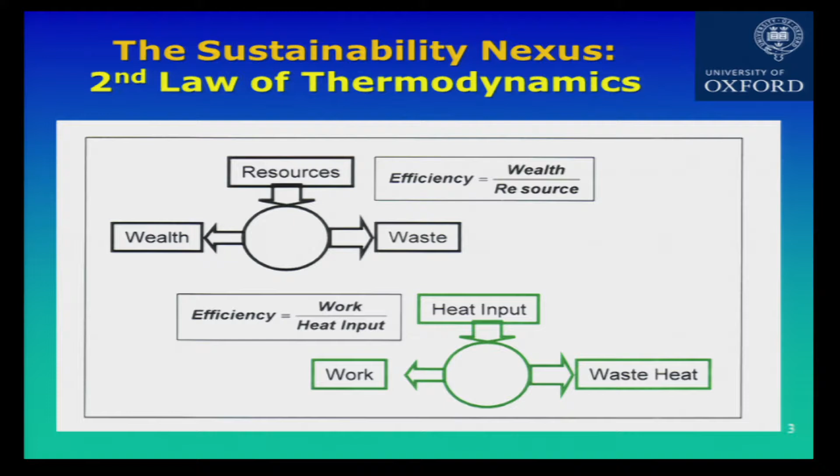In the same way, you can think about sustainable processes as turning precious resources - that may be raw water or raw energy - into something of value to society, in terms of wealth, but also in terms of waste. The efficiency can be measured as the ratio of the wealth we create - I don't just mean money, I mean quality of life, general wealth - to the resources used. I think these two are comparable, and it means there's a constraint to how well we can do this. But we know we can design more efficient car engines and jet engines. Why can't we invent more efficient processes and systems that create valuable benefits from the resources we consume? That's another thing to bear in mind.

Let me remind you again of the challenges of the water, energy, food nexus. We know that many people in the world - about 1 in 6 of the population - have no access to safe or clean water. An even bigger number have no access to proper treatment of their wastewater or sanitation. That means a very large number of deaths per year related to poor water, poor hygiene, or poor sanitation - this is the clean water nexus. Most of those affected are children under the age of 5. Even in developed countries like the UK or in Brazil, people are affected by water poverty.

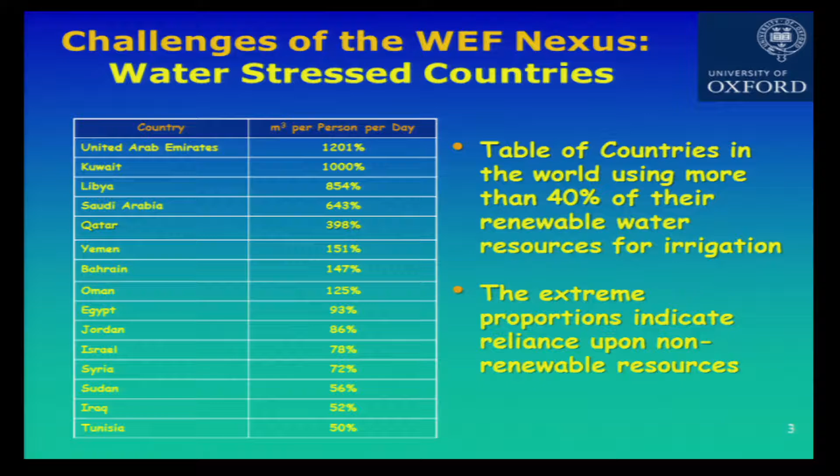Let's look at some other examples—the interaction of water with energy. This diagram shows pictorially how much water we use to generate electricity. In a combined gas and steam cycle, we consume between 7,000 and 20,000 gallons of water to produce 1 megawatt hour of electricity. A megawatt hour means a megawatt for an hour. A typical power station produces maybe a gigawatt, running constantly, so you can do the math—power stations use awfully large amounts of water.

It increases if you have a power station fired by coal and oil, and even higher if you have a nuclear power station. So people say let's switch to nuclear power because it's safe—well, debatable—or because it's non-carbon, it doesn't produce greenhouse gases. But look at how much water it uses. So you do well for energy, but you do very badly for water.

Let's look at the energy required to generate water—the other side of the wall, if you like. How much energy do I need to create water? If I simply take water from a lake or river and purify it—treating it to remove organic matter, colloids, bacteria—I need about 1,400 kilowatt hours, so about 1.4 megawatt hours, to produce that amount per million gallons. Comparing the two, you can see that quite a lot of energy is needed to generate the water, which doesn't look very sustainable either.

Groundwater requires slightly higher energy, since it's often saline and needs desalinating. Interestingly, if we recycle wastewater, it doesn't require much more energy than purifying surface water—for about double the energy, we can recycle our wastewater. That means wastewater treatment should be a very attractive proposition, something we really need to think about, as it offers at least a medium-term solution to a water crisis. If we're really desperate, we can go to seawater and desalinate that.

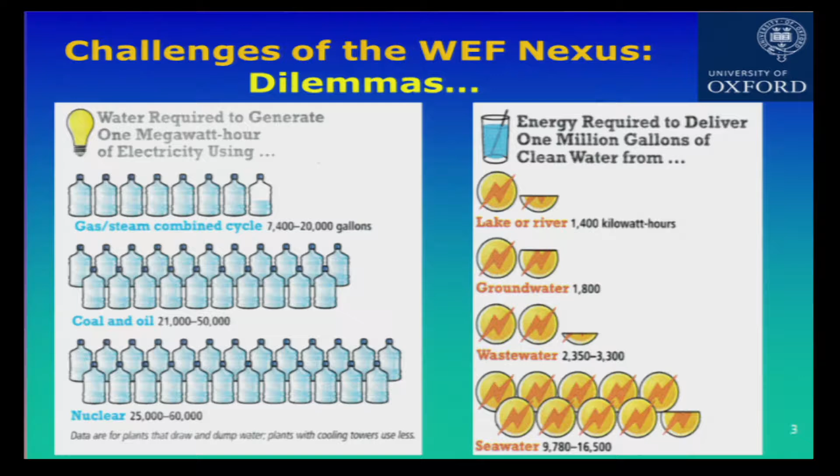That means we really can't be using conventional energy generation to produce water. We need to use renewable energies - solar power, wind power, geothermal energy - to generate this electricity directly without the use of so much water.

Let's look at an example maybe closer to home for you, which is biofuels. We can go from gasoline vehicles to ethanol vehicles, hydrogen fuel cell vehicles, or hybrids. I've noticed here in Brazil there are quite a few hybrid vehicles now, with a new model by Toyota I think. The idea is you can either plug them in, or when you brake the car that generates electricity to power the battery. The point is that by using these kinds of fuels, you can reduce the carbon impact and the production of greenhouse gases.

But in order to run them, you need water. Even to produce gasoline, I showed you a picture this morning of a refinery - you need lots of water to run refineries. If you go into a plug-in hybrid vehicle, you need a lot more water because of processing the energy source. Hydrogen fuel cells need water to operate, so that's even higher. But look at this - for an ethanol vehicle you need 100 times the amount of water.

And that's simply because we have to grow the sugarcane, which needs a lot of irrigation. So if you think biofuels is going to answer the climate change problem, it may well do, but it's not going to answer the water problem.

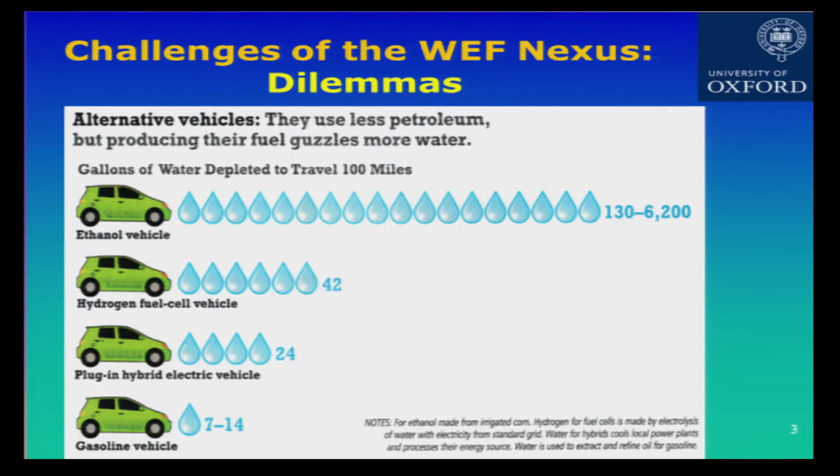I discussed this with Professor Eduardo this morning, and he shrugged his shoulders and said, well, where we grow it in Sao Paulo, we have plenty of rain - it's not a problem. But we can't do this worldwide; we don't have this amount of water worldwide. So you see how we get into this problem where we solve one issue in the nexus but create another. I think that's a very difficult challenge, to solve them all simultaneously, but that's really the way forward.

So the first part of my lecture, I hope, has convinced you that clean water provision needs to be integrated well within the water, energy, and food nexus.

It's also obvious, I hope, to common sense, that if we're short of water the answer is not just to build new reservoirs. You have a lot of reservoirs in Sao Paulo state, on the Tietê River, on the Paraná River - I've seen quite a few of them. You can't drill new wells into the earth, you can't build pipelines to transfer water over very large distances, because all of these things require huge amounts of resources and energy, and they're just not sustainable.

So what we need is novel or improved sustainable technologies which are efficient both in terms of energy and chemical use, and importantly have a low cost, a low footprint in terms of the environment, carbon footprint, and climate change - and they are urgently needed for water reuse and desalination.

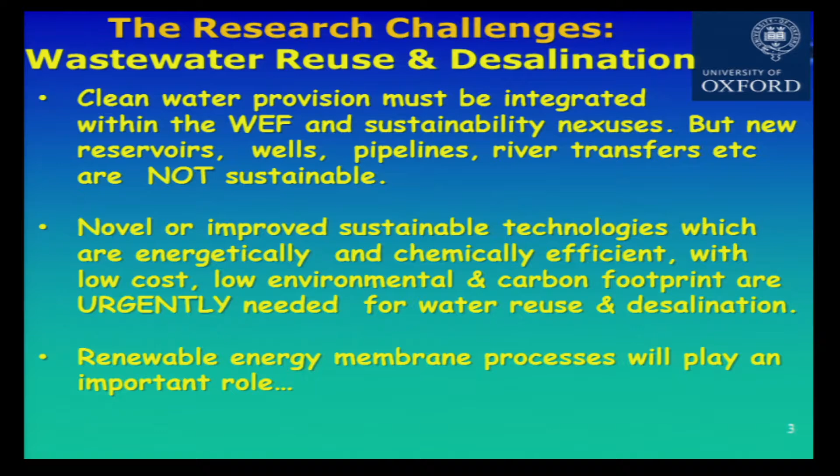I just want to make a few more points about wastewater treatment, which are quite important now in Europe. The emphasis in wastewater treatment now is on reducing waste, on reclaiming valuable resources, and recycling those resources. So we have water that we can recycle, but we also have in the wastewater raw materials like metals, as I explained this morning, and embodied energy - organics that can be converted into methane, which can be used as a kind of renewable energy source.

So wastewater is not wastewater, it's a resource. It's a resource that should be won - so don't use the word waste. We have a saying in English: waste not, want not.

You mustn't waste it, think about it as a resource. Here are some of the problems coming onto the horizon in Europe and the UK, and I believe here too: how we remove emerging microcontaminants, things present in very small concentrations but that cannot be removed by conventional processes like activated sludge.

They include disinfection byproducts caused by chlorination of organics in wastewater, endocrine disrupting compounds derived from human female hormones like estrogen, and trace heavy metals and pharmaceutically active compounds like ibuprofen or beta blockers used to treat heart disease. They're all appearing in wastewater, and they have to be removed or they'll have an effect on the local environment. That's a very serious problem now in Europe.

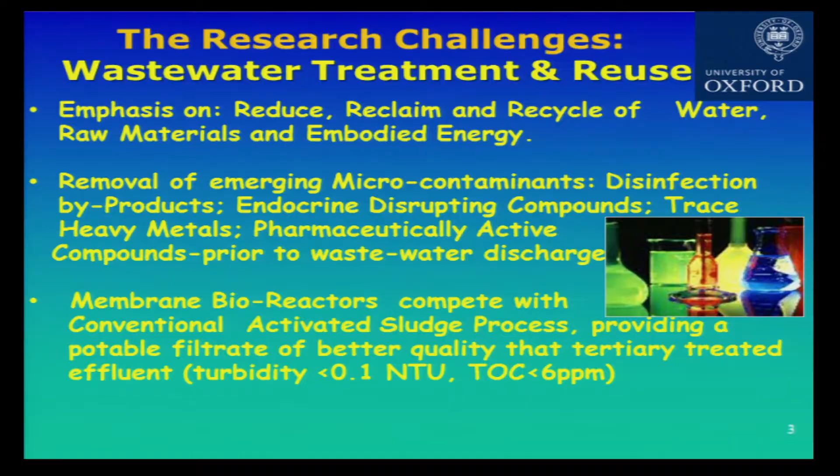Another point I'd like to make is that membrane bioreactors have a future because they're competing very well now with conventional activated sludge. We've had activated sludge for more than 100 years with very few improvements, but it can really be improved using membrane bioreactors. It will provide a potable filtrate of better quality than tertiary treated effluent, with very low turbidity and very low TOC. So the water we can recycle using a membrane reactor can be very good.

Now, a few statements about what's happening in the world. It's estimated that by 2030, there'll be a global water shortfall of about 2,700 billion cubic meters of water. Just as a calculation, supposing we were going to generate that amount of water through desalination, which may be where we're headed, fossil fuel desalination would consume something like 770 gigawatts constantly, creating CO2 emissions.

And I did the calculation: 3.4 gigatons a year, and that's 10% of global emissions. So by trying to fill the water shortfall using desalination, we're going to create 10% of global emissions. This is clearly not sustainable.

And that really brings me back to the idea that we have to think not just about desalination, but wastewater treatment. We have to use less and do more with it.

So membrane separation technology and nanotechnology are certainly on the increase, increasing annually in products and services. The market by next year is expected to be about $52 billion US, risen by 320% from just 10 years ago. 50% of that market is in the Middle East and North Africa, not surprisingly. The market for reverse osmosis alone, used both for desalination and wastewater, is going to reach 40 billion.

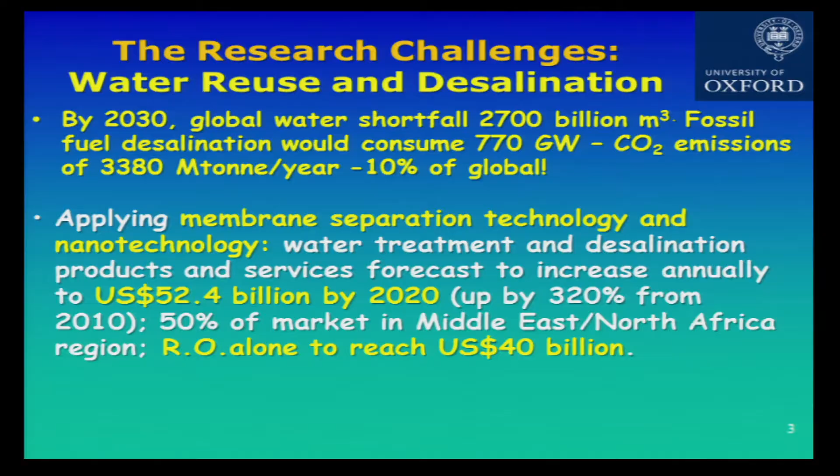So if you're a speculator on the stock market, you should invest in membrane technology because you're going to make a lot of money.

So I'm going to talk a little bit about membranes and nanotechnology. We've said there's a growing market, not just for water but other applications, but 50% is actually in the water sector alone. Global demand is increasing by about 9% annually to this kind of figure. Membrane modification technologies, which I'll talk about later, are being used to improve the efficiency and performance of the membrane.

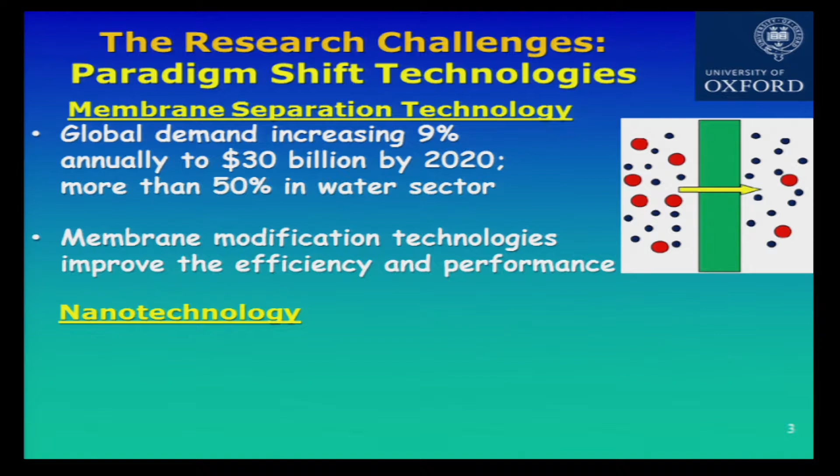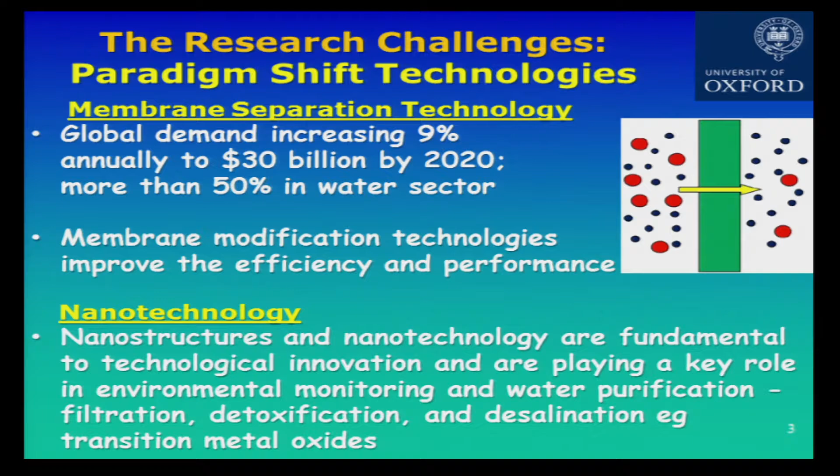We can also think about nanotechnology. You've all heard about nanoparticles, nanostructures, and so on. They're playing a fundamental role in technological innovation, and very good roles now in monitoring the environment and for water purification, things like filtration, detoxification, certainly in desalination. These two areas, I think, are of rapidly growing importance, whether you like it or not. This is really where a lot of time and energy needs to be devoted if we're going to develop these new and sustainable technologies.

Now, there may be other technologies, bioreactor technologies, which I'm not expert in, so I'm not saying this is the be-all and end-all. It's not the whole story, but it's an important part of it.

So let me explain to you a little bit about what membranes are. A membrane is really a separation between two phases. It's a very thin sheet, an interphase separating two phases which selectively controls the transfer between the two phases.

In other words, supposing I have a membrane which contains different kinds of particles, some of the particles will be rejected and some will move through. The size of particle that moves through will depend on the kind of membrane I have. So if I start with what we call a microfiltration membrane, it will allow anything to move through apart from fairly large particles of the order of 1 micron.

An ultrafiltration will reject both particles and macromolecules, things like polymers, sugars or proteins. A nanofiltration will reject things like acids, divalent salts and sugars, but allow other things to move through. The tightest membrane we have is reverse osmosis, which will reject everything, including monovalent salts, but allow the water to move through.

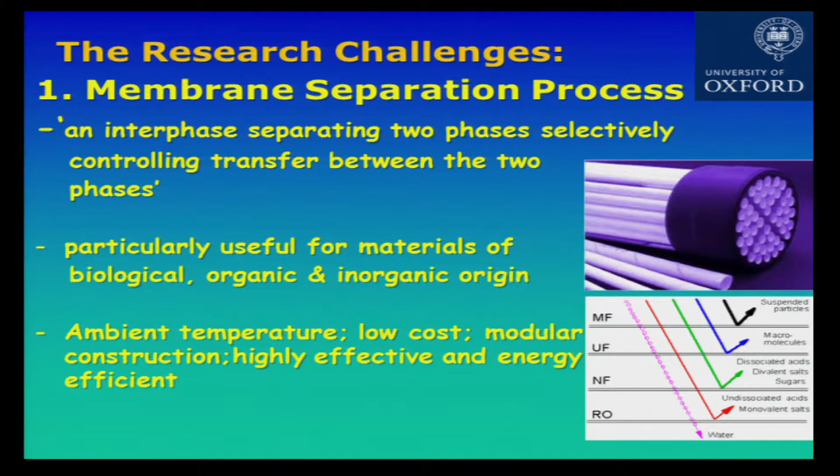By selectively changing the pore size in the membrane, I can selectively control what moves through. It turns out that it's particularly useful for materials which are of biological, organic, or inorganic origin. And guess what? Most contaminants in wastewater are one of these three, so it's obviously a very good choice.

Better still, they can be run at ambient temperatures, so 20 or 25 degrees. They have a relatively low cost. They can be built in modules, so we can build them like Lego and put them together, and they are highly effective and energy efficient.

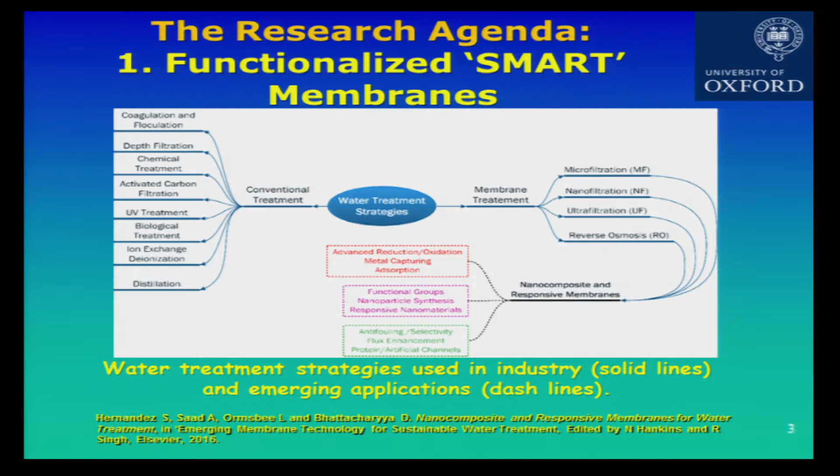But there's only so far we can go with any kind of water treatment process, because we have a thermodynamic energy limit. There's a minimum energy required to treat and clean up a water stream. If we calculate this minimum energy, it gives us a benchmark against which to compare processes. So how do we calculate this?

Well, we need to use a little bit of thermodynamics, the first and second law. What we do is calculate the energy of mixing. If we have clean water and mix that with contaminants, we'll get an energy of mixing. The work required to purify that stream is exactly equal and opposite in size, because we're using a reversible process, and that's related to the free energy of mixing.

We can actually calculate it from the osmotic pressure and the volume. Then we can calculate how much that energy will be as a function of both the recovery, the amount of water we reclaim, and also the concentration of the salt or solute in that solution. You can see that as recovery increases, the energy increases, but as I go from a dilute solution to a more concentrated one, I need more energy as well.

So this is where we are right now: 50% recovery of a solution which contains about 25 or 35 grams a litre, equivalent to seawater. You need roughly 1.1 kilowatt hours per cubic metre.

Now this graph on the right explains how the requirement for energy has dropped over the years. In the 1970s, we were using 15 kilowatt hours per cubic metre to carry out that water treatment, and it's dropped exponentially, but it's reaching a limit. This dotted line is the thermodynamic limit, and we're actually only about twice that limit. So there's not much further we can go.

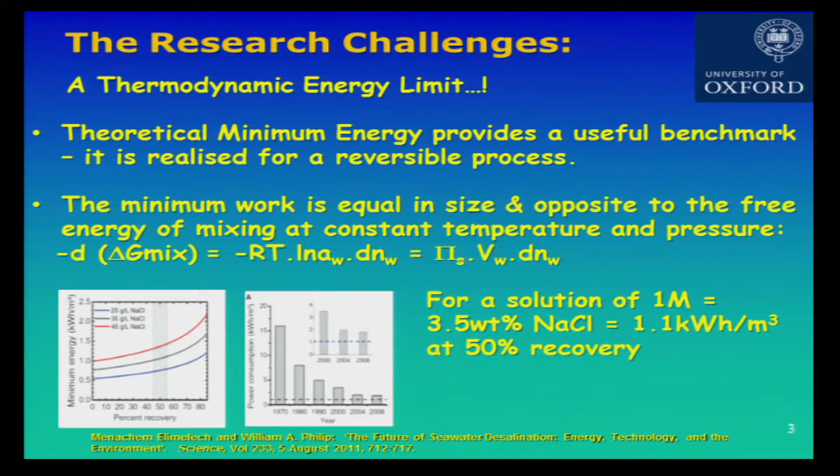I've amplified it there; you can see that we're getting very close to that line. So we're doing very well, and that means we've kind of reached an asymptote that we can't go beyond. So what do we do? We've got an almost perfect machine now to desalinate things, but there must be a way forward.

We've created energy-saving devices in things like reverse osmosis, where we can do energy recycling. In this device, you pressurize the seawater to move through the membrane, and some of the energy associated with the rejected water can be used to increase pressure back into the feed water. So this is a way in which we recycle energy.

You've also probably heard about new kinds of membranes, things like graphene sheets that are being used for desalination, or carbon nanotubes. That's another area. In these types of membrane, you can have an almost perfect separation of water. The water will move through the carbon nanotube, but the salt gets trapped. So these are kind of almost biomimetic - they mimic nature, and they're becoming very, very efficient.

But that means we're getting very close to the limit of what we can do. As we approach the thermodynamic limit, having high permeability membranes is not going to reduce the cost of reverse osmosis, because you can calculate the energy we require and the excess energy for pumping. What we're going to find is that the pumping energy is very close to the osmotic pressure, because that means we're operating almost reversibly, and there's very little difference between the two.

But if we can create membranes that allow higher fluxes, the beauty of that is that we can have smaller modules. So if we have smaller modules, that means we have a smaller plant, and that reduces the cost of the plant. So it's not so much about the energy of running the operation as the cost of building the plant in the first place, and that means we can save a lot in size. I believe there's not much future now in making very, very nice membranes, because we're already getting near to that limit. But it will mean we can build plants more cheaply, and I think that's important.

But there are other things we can do with membranes. We can make them smart. We can make them do things we want to do. This picture's not very clear, but we can make membranes in two ways.

We can cast them into flat sheets, or we can spin them into hollow fibers. Either way, we can change the surface properties. We can make them hydrophilic, we can give them charges, we can give them functional groups, and that means we can make them antibacterial, photocatalytic, or adsorptive, giving them special properties. Now here's an example.

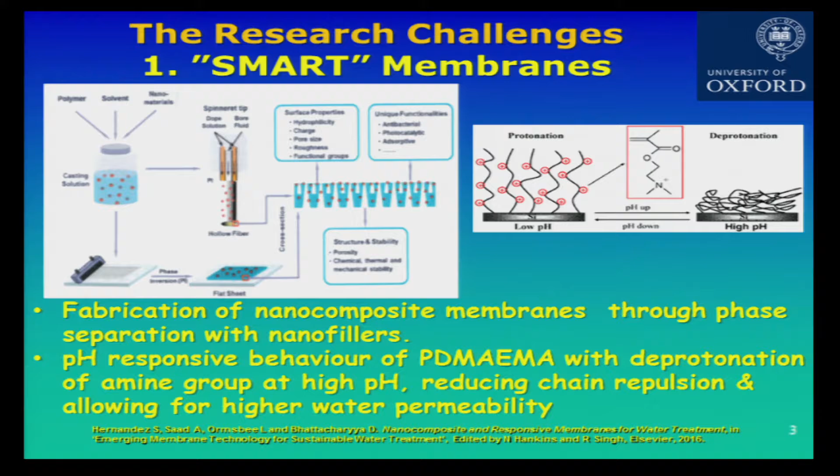I can have a polymer which has functional groups. These groups become protonated at low pH, but at high pH they lose their protons, and therefore the repulsion decreases, and you see how that collapses. So if I have a polymer like this which collapses, the permeability becomes higher because the water can move through, whereas otherwise it's getting trapped. So by changing the pH, I can change the permeability - the permeability of the membrane will respond to the pH of the fluid passing through it.

And this can be done using different kinds of nanocomposite membranes. So we have the ability to make smart membranes, and that means there's a lot of future for new kinds of devices we can make, with membranes responding in a smart way to the fluids they're supposed to treat.

I mentioned renewable energy. I think there's going to be a future in the use of renewable energy to drive membranes, for precisely the reasons I said before - that we can't rely on electrically generated energy, it's just not sustainable. But there are lots of examples of renewable energy. We can get it straight from the sun using photovoltaic cells to generate electrical power, but we can also use solar energy to generate biofuels, as we know. So that's a primary source of renewable energy.

Secondary sources too, because when the sun shines, ultimately it creates wind. The movement of the wind creates waves. The movement of the moon creates tides. We also have geothermal energy deep within the earth. And finally, don't forget, we have a lot of waste energy coming out of industry - power stations generate a lot of waste energy, and that's a resource in itself. I'll show you in a minute how that might be used in a device.

Here I've given you an example of desalination processes being used to desalinate water. Here we have reverse osmosis being used with energy recovery to generate clean water. So I think renewable energy is going to play an important part in membrane water treatment.

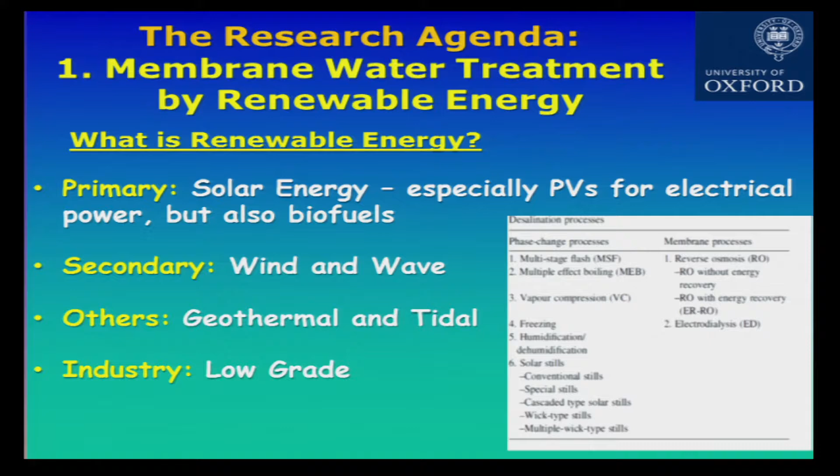Okay, now I'll talk very briefly about nanotechnology, just because of time limitations. There's lots of applications now for nanotechnology in all of these different kinds of systems.

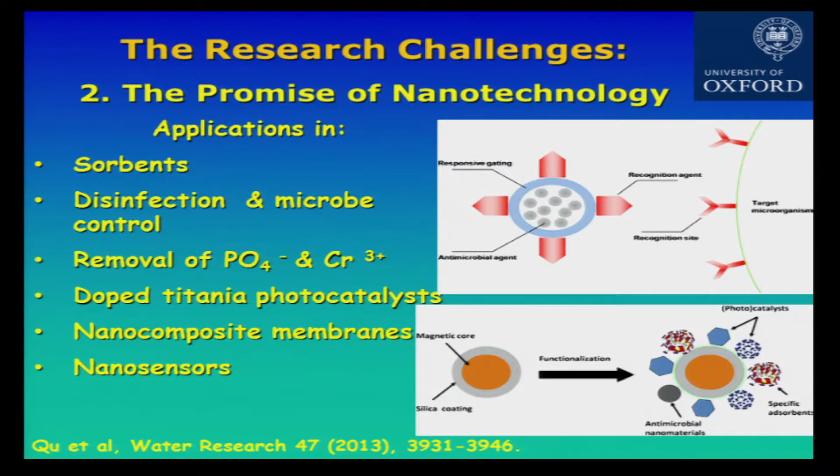So a lot of active research going on in this area. I've quoted a very good review paper on that, well worth reading if you have the time. So a lot of promise in nanotechnology as well.

Now I'll bring the two together and talk about one of my particular research interests, which is forward osmosis. There was a report in National Geographic magazine not too long ago which said that forward osmosis was one of the three technologies that promised to reduce the energy requirements of water reuse and desalination by up to 30%.

And if you go to the literature and study the output of articles on forward osmosis, you'll find that the number of articles published has increased very sharply in the last 10 years. So there's been an exponential increase, and it's about to level off, but there's about 200 or 300 publications every year in that subject alone. So that's one paper every day just on forward osmosis.

What are the other technologies? Well, I mentioned carbon nanotubes. Here you have a membrane that's made by fixing carbon nanotubes into a kind of sheet, and you can see that water moves through almost unhindered, without any problem at all, but the charge groups get trapped. So carbon nanotubes are good to make membranes. The only problem is the biggest membrane we ever made was about a square millimeter, which is not practical. We need much bigger membranes.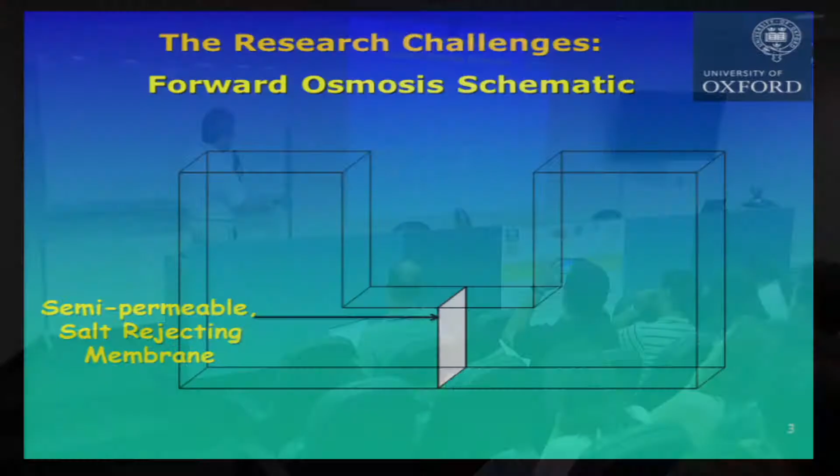Let me talk a little bit more about forward osmosis, repeating this for some of you. In forward osmosis, we have two solutions: a feed solution that we'd like to treat, and a draw solution which is going to pull water out under osmotic pressure. Between the two, we have a semi-permeable membrane which will reject the salt but allow the water to move through. So I start off with my saline feed water.

That may be wastewater, or it may be seawater. On the other side, I have this thing called the draw solution, which is an idealized solution that's concentrated, but it contains a solute that I can easily remove, just by changing its temperature, or by using a magnet, or some other method. The point is, this has a very high osmotic pressure, and what it's going to do is draw this water out into here.

So let's see that happen. You see how the water's been drawn from the left hand to the right hand through this semi-permeable salt-rejecting membrane.

And that means now all I need to do is remove this solute, and I can recover the clean water. And that I can do using cheap resources. I can use waste heat. So I'm going to put this all together and make a device that can be used both to treat wastewater and to recover the clean water from it.

So I'm going to create a thing called an FO membrane reactor, and in brackets, I have a thing called an MD, which is a membrane distillation. I'll explain how that works in a minute. But the point is, here you have a membrane inserted into a biotank, so you have a biological process going on that's creating sludge.

And the water within this tank has been drawn out by this draw solution. So this means the organics become more concentrated and react more rapidly. But the clean water is being drawn out into the draw solution. All I have to do now is use some waste heat to generate the clean water.

So now I'm just going to concentrate a little bit on this device using a thing called membrane distillation, which some of you may not have heard of. Let me explain what it is.

In essence, what you have is a membrane with two streams on either side: a hot stream here, a hot feed, and a cold permeate. This membrane is very hydrophobic. It won't allow water to move through, but it will allow water vapor to move through. So this hot feed has quite a high water vapor pressure. The water vapor moves through the membrane, reaches the cold side, and condenses.

And then the only difference in device design is really a question of how we create that cooling effect. In one case, I have an air gap, and I use a cold surface that allows the liquid to condense, and I can collect it here. In this case, I use a cold sweeping gas to collect the permeate. Or in this case, I just have a vacuum, and again it will condense out into the vacuum. So here I have a liquid gap, and here this one is a cold sweeping gas and a condensing surface.

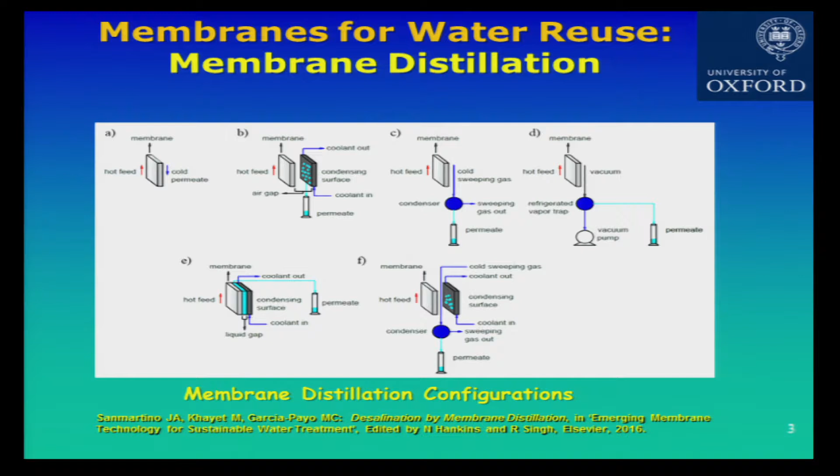So these ideas can be combined, but this is the basic idea: you have hot and cold, and the water vapor moves through. So if I have a salty solution or a draw solution here, I can recover the clean water on that side, and I can reconcentrate my draw solution there.

Now, this all sounds very fun, and I was chatting to Professor Eduardo this morning. All fine and well if we can do it in the lab, but does this really work in the real world if we try to scale it up? And the answer is yes, it does, because it's used in Singapore.

Singapore is the country for recycled water right now, and they have a product called NeWater. NeWater is essentially taking human wastewater and recycling it into potable water. So if you buy potable water bottles in Singapore, almost certainly that's passed through a human being, which is interesting because it's a total recycle.

And the way it works is you have a conventional activated sludge process, which recovers about 97% of the water from the dirty water, but then you need a membrane process, a microfiltration, ultrafiltration, to remove some of the very large, nasty organic materials. And finally, you have a reverse osmosis to allow polishing. Now, that means across the process, you have a recovery of about 73%. So not bad. We start with 100 units of wastewater, we recover 73 units of potable drinking water.

We can improve on that if we combine a membrane bioreactor with an RO. This is something that's ongoing now in Singapore. The membrane bioreactor, rather like the CASP, will give you a high recovery, and then you apply a polishing step. In this case, we can recover slightly more, so we can take that up to 78%.

But if you use an FO-MBR, you can have a very high recovery from the wastewater, and then if we apply MD or RO, as I just showed, to clean up the draw solution, you can achieve 94% recovery. Compare that to that, and that's using less energy than that. So there's a real future for this device, and indeed, there are people in Singapore who are actually working with me on this process.

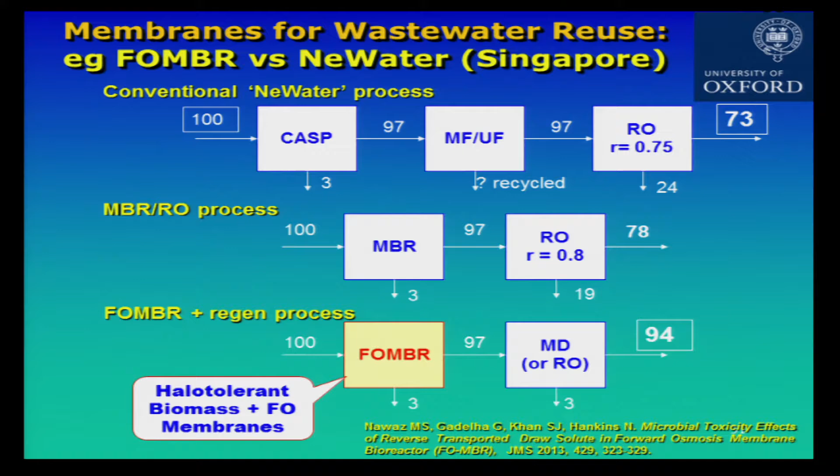The only catch is that in the membrane tank, you need to have a biomass which is halotolerant, so it has to deal with the higher salinities in the tank. But we know that it's easy to actually generate the right kind of colonies to do that. We also need new kinds of membrane, but anyway, it does work.

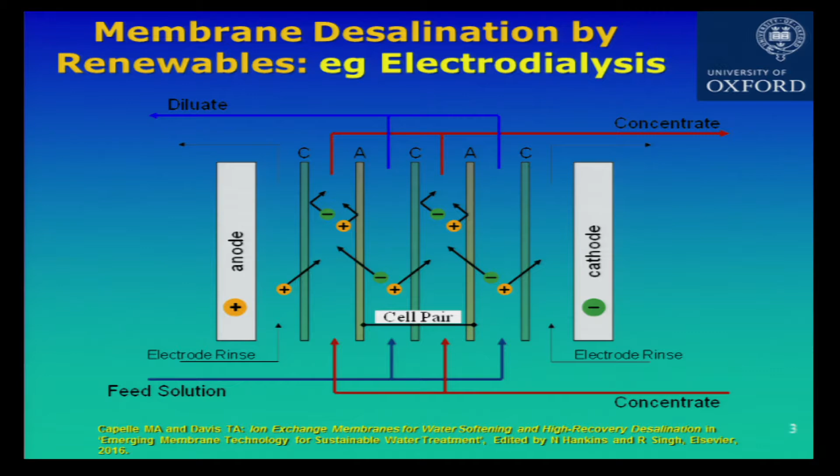I'll give you some examples of how we can introduce water treatment sustainably within the WEF nexus. There's an obvious one, which is where we're generating power near to desalination plants. If you go to the Arabian Gulf, which I do very often because I have a large project in the country of Bahrain, you'll see that very often they have very large desalination plants on the coast which are near to power generation, because you need the power to run the desalination plant.

But it turns out that the brine concentrate produced by the desalination is pumped back into the sea, and that's very bad because it has a serious environmental problem. If you go to the Arabian Gulf, you'll see there's very little alive in the sea there because it's so salinated now, and because there's so much traffic moving through the sea anyway. But the brine can be diluted using the cooling water from the power plant, so at least we can alleviate some of the problems on the environment by diluting it with the cooling water from the power plant itself. So that's one thing that's starting to go on.

Here's another idea that I developed, which is where you combine the sequestration of carbon dioxide and capture with desalination by forward osmosis. It really starts down here, where we have a saline aquifer containing salty water that we'd like to remove water from, but we need to do desalination. On the surface here, I have a power plant generating carbon dioxide—I'm burning coal with oxygen to produce carbon dioxide. So what I do is use calcium carbonate as a kind of adsorbent to remove the CO2.

Calcium carbonate will dissolve in water at the right pH to produce calcium bicarbonate, and that actually acts as a draw solution. So we use that as a draw solution to remove water from the salty water down here, and that gives me a dilute draw solution. If I then use the waste heat from the power plant, I can regenerate the draw solution in the way I explained, and that creates clean water.

Some of that clean water has to be used to dilute the draw solution, but some of it is clean water. So if you look at the overall material balance here, I'm putting in carbon, extracting H2O, and going to sequester my CO2 into the aquifer. It doesn't get better than that—you're solving two problems at once: one is CO2 generation, and the other is desalination. So we already made a patent on that, and we're in discussion with a company in Israel to develop it as a technology.

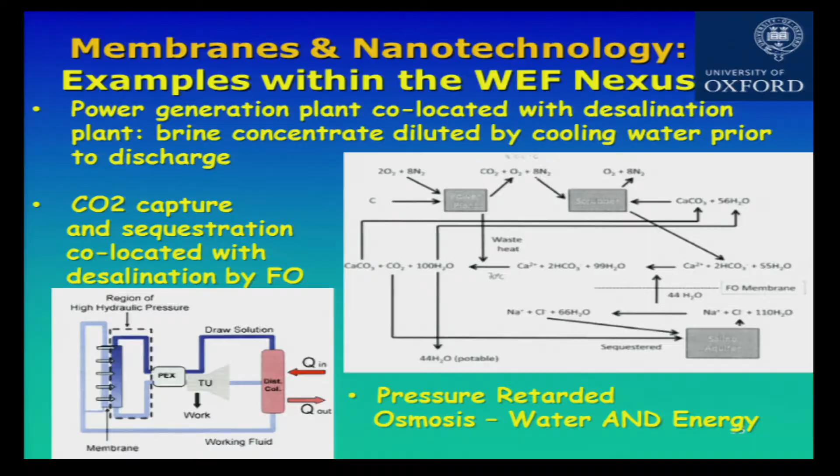Then we use a small distillation column here to regenerate the draw solution. So the draw solution is being recovered and concentrated to be sent back in here, and then the working fluid is sent back in here, and it's drawn back across the membrane to generate more power. So what I basically get is clean water and I get work coming out. Pressure retarded osmosis is another area of active research in Singapore.

I'm getting to the end of the talk. I want to talk about ways in which we can actually hybridize desalination with wastewater treatment to run the system at low energy.

So what I do is I start off with some wastewater, which is fairly low salinity, and I treat that using a reverse osmosis process to give me clean water and brine. So this is the wastewater brine, I've removed the organics but I still have salt. Now I have clean water and one volume of wastewater here, which is brine.

What I can do is use that as a feed into another process where I'm using seawater as a draw solution. So one unit of seawater comes in and it's being diluted because it's the draw solution. The brine is the feed, and that's being concentrated, giving me a product which can then be desalinated. This is more dilute than that, so when I dilute this seawater solution, I need less energy.

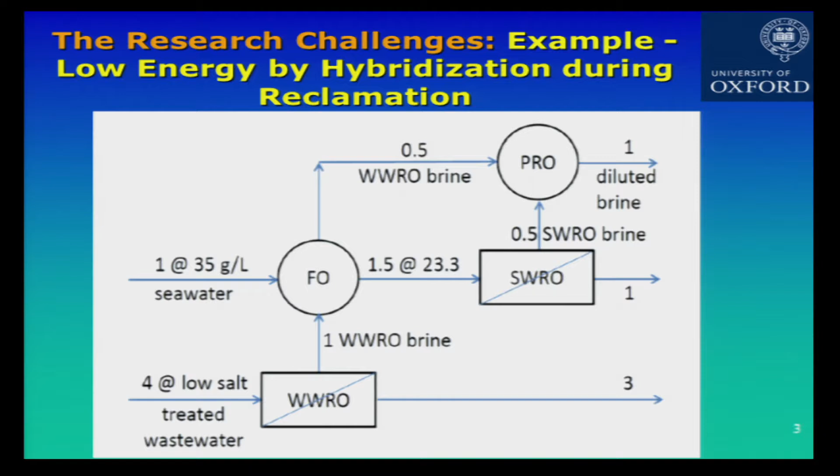So if this is a conventional seawater reverse osmosis, I have to take the water in and pre-treat it. Even pre-treating the water takes about 0.3 kilowatt hours per cubic meter. I then run the RO plant, and I showed you the figures earlier - even with energy recovery, I'm needing about 2.2 kilowatt hours, and then I do some post-treatment. So the energy balance turns out to be about 2.5 kilowatt hours per cubic meter.

Now let's use a low energy hybrid process. The FO dilution, created by using the wastewater reverse osmosis brine, pays some energy back. The RO plant is running at diluted condition, so it requires less energy as well. And then by generating power from pressure retarded osmosis, I have some more energy as well. So add those together, and the total energy requirement is minus 0.8. Compare that to that - that's almost 3 times lower, or more than 3 times lower.

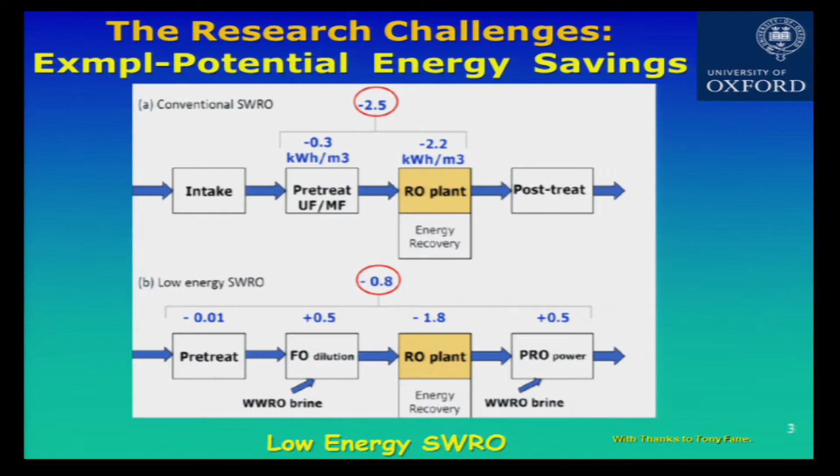So by combining wastewater treatment with desalination, which is something accessible to you here in Brazil, I think you can save a lot of energy.

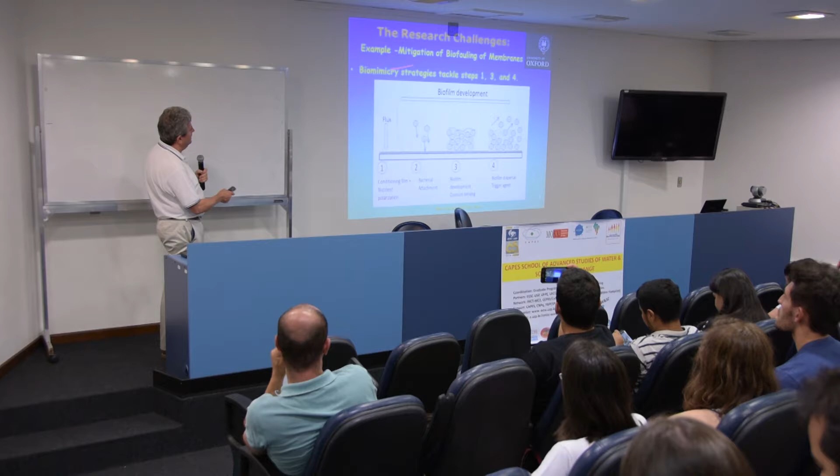And the final idea, just very quickly, biofilm development. I mentioned this morning that biofouling is very bad for membranes, but there's clever things we can do with biology to try to reduce the development of biofilms in the first place. So bacteria attach, and it turns out that bacteria talk to each other through a thing called quorum sensing. They send out biochemical markers that say, hey, I'm here, come and join me, and then they all start growing together. And it takes a lot of dispersal to get rid of them.

So what we can do is quorum quenching, where we try to suppress these biochemical signals to stop them from attracting each other in the first place. That reduces the biofilm development. So that's an area of active research, not my own, but it's going on right now as a way to mitigate the biofilm problems.

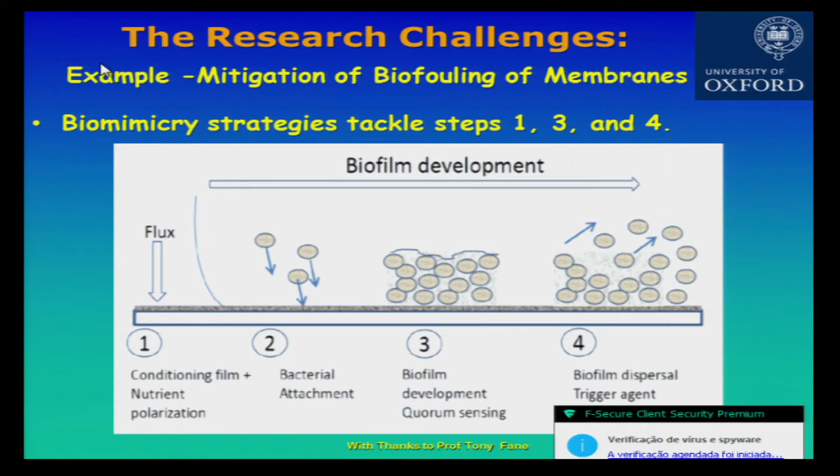So a colleague of mine at Oxford who's been to this university many times, René Bañares-Alcántara from Mexico, is looking at the generation of ammonia to do just that thing.

But in times when it's cloudy, not windy, and there's no waves, you can put this into reverse and run a pressure retarded osmosis plant to generate energy on demand. That means you can go in both directions, so there may be some future with this as a way to store both renewable energy and generate water.

So this is the osmotic battery concept. I should acknowledge my colleague in Singapore, Tony Fane, who invented that idea. Do have a look at Tony's publications - his H-index is something like 200, so he's a good guy.

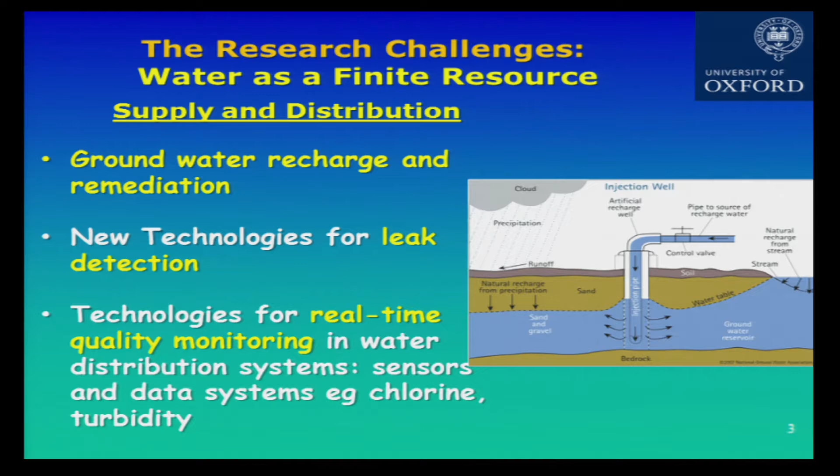I was going to mention very quickly water as a finite resource, so we can recharge water back into aquifers. We should think about leak detection because lots of water gets lost in the distribution network through pipe works - almost 50% of the water can actually leak away. We need real-time monitoring for distribution systems.

Okay, I'll just try to wrap up. I think in the future we need to invest in R&D to integrate sustainable or renewable energy with both water reuse and desalination. The key membrane areas for me are going to be in all of these membrane technologies - forward osmosis, electrodialysis, ultrafiltration, and of course controlling the fouling on the membranes.

In particular, we need new membranes and draw solutes for forward osmosis. We need to do better with membrane distillation - better membranes and modules - and also address pretreatment so that we can reduce the energy consumption. Finally, I've mentioned groundwater reinjection as a way to store the water.

I think we should think a lot more about community-based water treatment, because a lot of places where people need water are in very small villages or small communities, and it's not practical to build treatment plants 1,000 kilometers away - you need to apply it at source. So community-based systems are a way of thinking in their own right, and I imagine there must be someone in this department thinking about that right now.

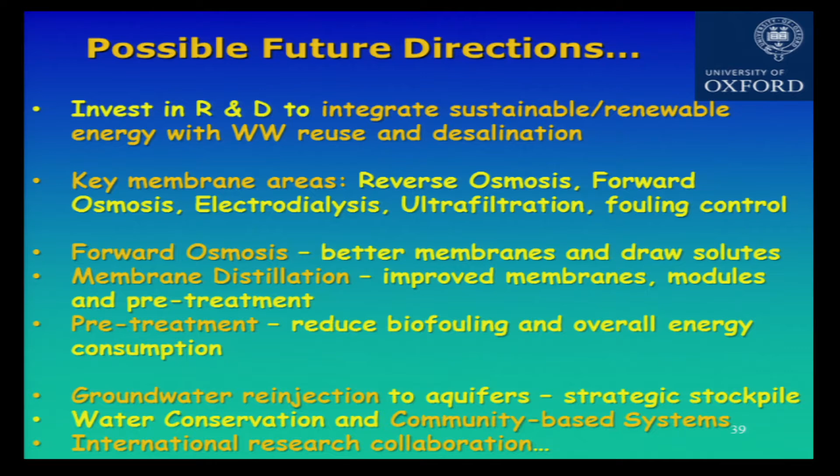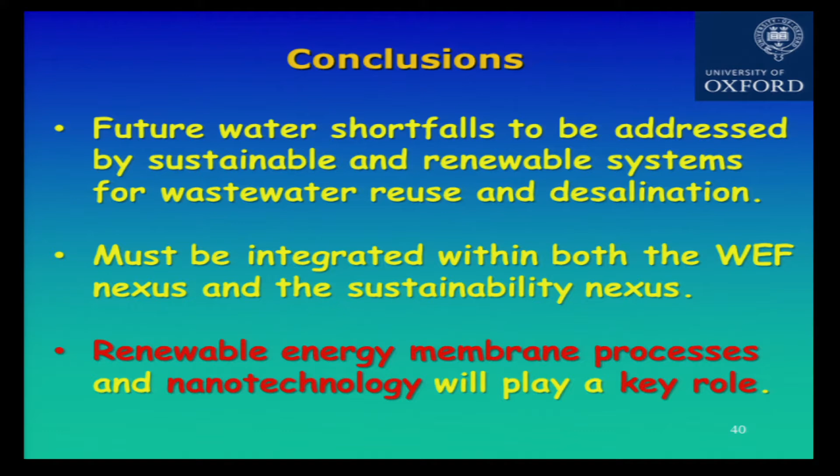We also need international research collaboration. So in conclusion, I think future water shortfalls need to be addressed by sustainable, renewable systems for both wastewater reuse and desalination - this is a key message from my talk. But they should be integrated both within the WEF nexus and within the sustainability nexus, and I believe renewable energy, membranes, and nanotechnology will play a key role.

So thanks for your attention.